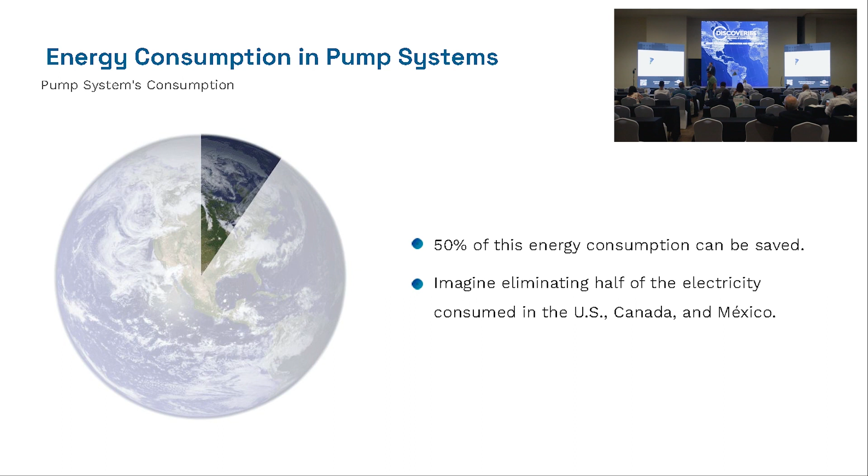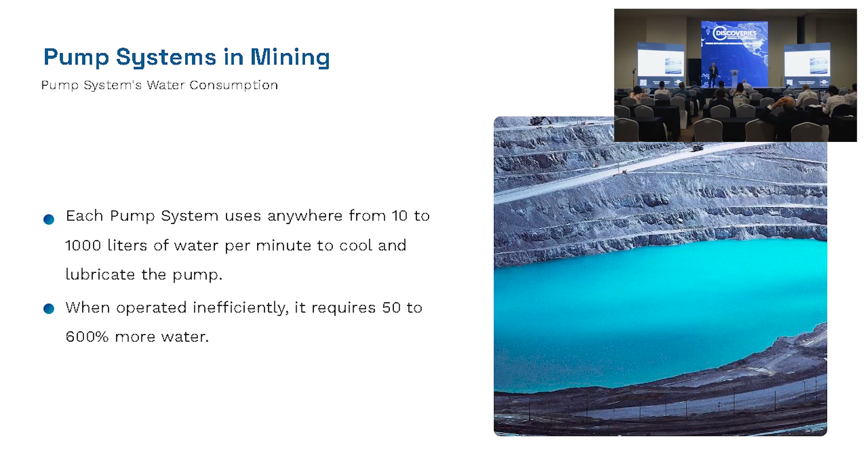In mining, up to 80% of the energy you're consuming is from the pump system. So this means we're talking about saving up to 40% of the energy consumption. And in terms of water, we heard earlier from the lawyer regarding the water consumption. Each pump system uses anywhere from 10 to 1,000 liters of water per minute to cool and lubricate the pump system. When operated inefficiently, which is what's happening in most cases, we're requiring 50 to 600% more water to cool and lubricate the pump. And there's been technology that's existed longer than me that can prevent this from happening. We can eliminate this water by 80%.

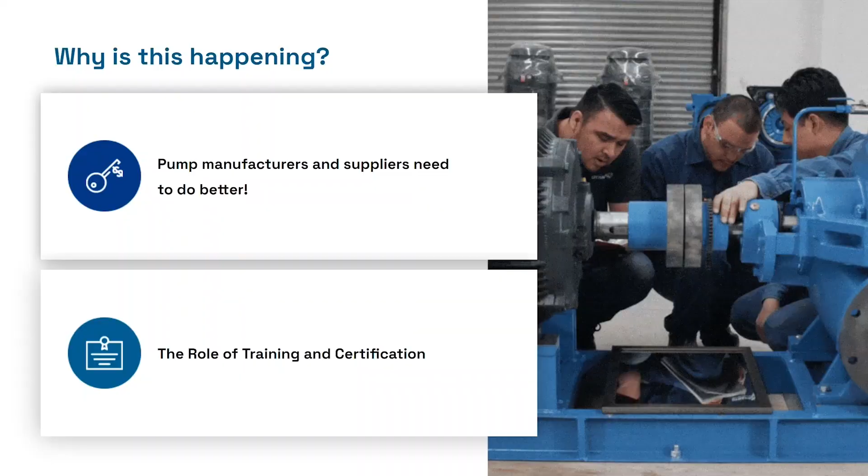So why is this happening? The first issue is pump suppliers need to do better. Right now, we're not selling the product properly. Right now, we're approaching the product as this is the most efficient pump, and it costs this amount, and that's pretty much your quotation, and that's what we're delivering to our clients. But we're not telling the true story about the pump system and why it's costing so much more in energy and water consumption. Which leads us to the second part, which is the role of training and certification.

We don't have the proper training and certification in the industry right now. I've looked high and low. I've taken different companies' trainings. I've been certified with different pump trainings. There's nothing that truly exists that gives the people who are actually operating the pump systems, the pump operators and the maintenance people, all the tools necessary to solve this problem.

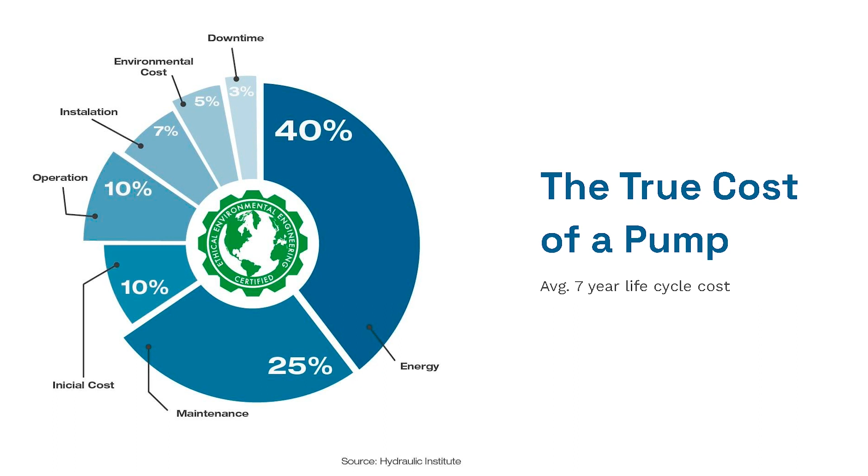And here's what happens. So this is looking at the first 7 years, the life cycle of the pump. And this is from the Hydraulic Institute, when they're measuring the energy consumption. So this doesn't even take into account the water consumption. But what you can see here is the initial cost of a pump is only 10% of the pump system's life cycle costs. The actual cost is in the maintenance and the energy consumption, but no one's paying attention to this. They're only paying attention to the upfront cost of the pump.

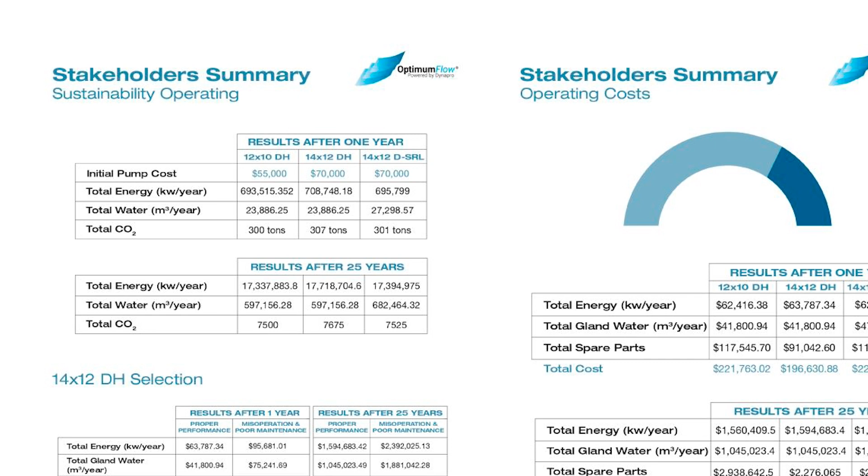So, it's difficult to see. However, this is the report that we've been working on to solve the problem. But you can see, maybe better than I can, on these first three right here is the initial cost of the pump. The first one's $50,000 or $55,000, the next two are $70,000, okay? And typically when we're selling a pump to a mine, they're looking at the efficiency of the pump. But that doesn't actually take into account how much energy you're going to consume, how much water you're going to consume, or even the CO2 that it's going to produce.

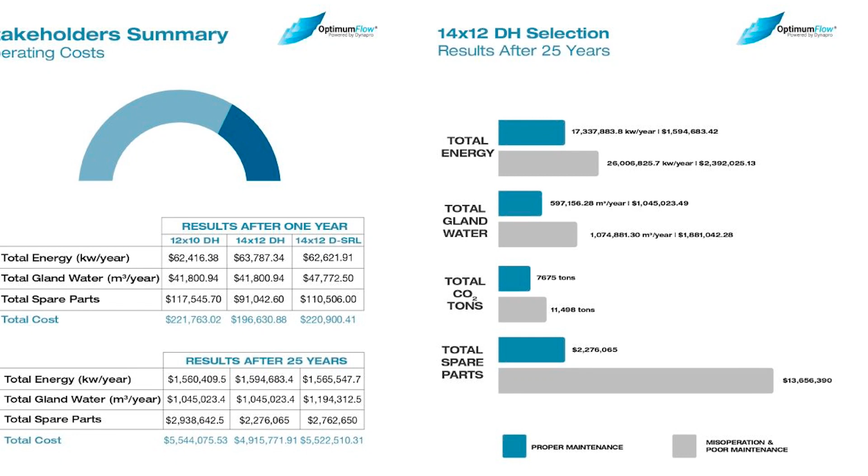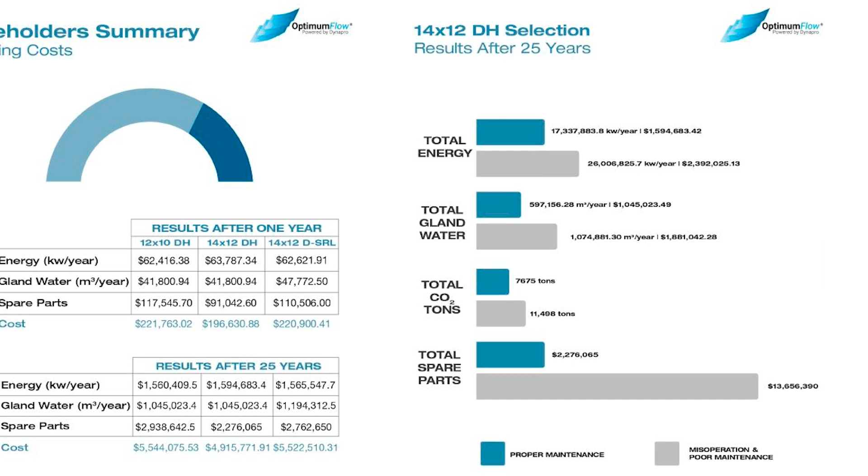And the last part, the total spare parts. So the maintenance of a pump system is actually directly related to how much energy and water it's consuming. And it's a telltale sign. So the more energy your pump system's consuming, the more times you're going to have to do maintenance. It means it's wearing down faster.

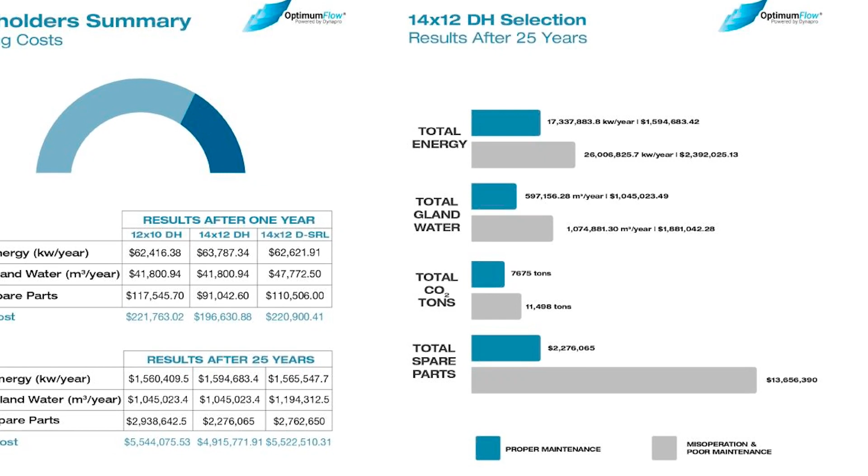And on this pump, the example, and these are examples that we have from the industry, we went from spending $2.2 million in spare parts over the 25 years to spending $13 million just in spare parts alone, okay? So we're talking about a difference of approximately $11 million. When we walk into these mines, they typically have about 300 of these pumps. So you can do the math yourself and how it's affecting your total cost of production.

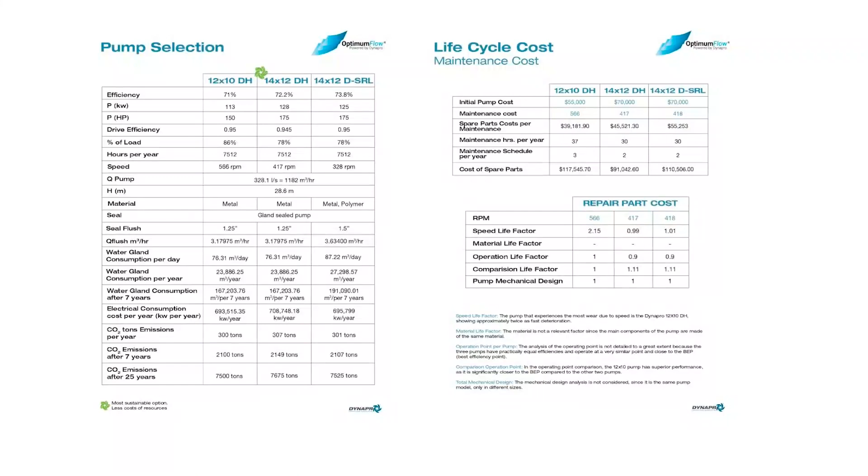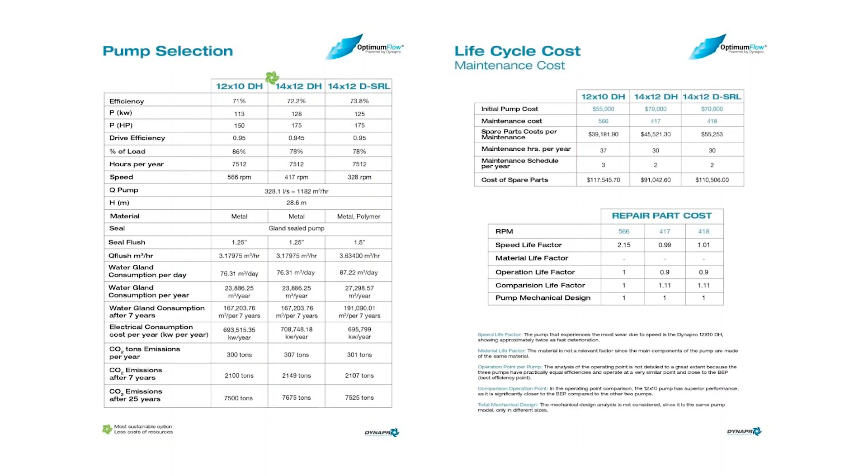So this is actually how we deliver our selection, and the selection provides you the complete breakdown, measuring everything that you need, the water consumption, the electrical consumption, the spare parts consumption. And what we can do is we can actually measure how much maintenance is going to be required. And it's by these different factors, by how fast the pump's running, the materials of the pump, the design of the pump, things like that. So we can actually predict it.

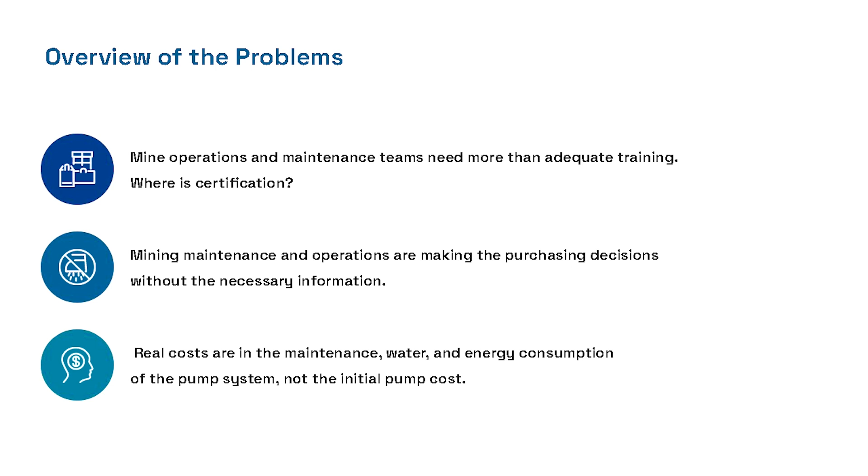But what's not predictable is how it's operated and maintained. And this is the real challenge. So mine operations and maintenance teams need more than adequate training. We don't have any global certification for this right now. Mining, maintenance, and operations teams are making the purchasing decisions, but they're making these purchasing decisions without the proper information.

They're basing it on, what's your price of the pump? How fast can you deliver it to me? Instead of looking at the actual life cycle cost of the pump. So the real costs are in the maintenance, water, and energy consumption, not the initial pump costs.

So who needs to be certified? Well, it starts with the actual pump suppliers and pump manufacturers. We have to have the salespeople, the applications engineers, everyone who's involved in the process of delivering that quotation to the customer. They need to be fully trained and certified. The next part is the mine maintenance and operations teams.

The people who are going to be in front of these pump systems for the next 25 years have to have the proper training. Right now, if you walk into any mine here in Mexico and ask them what training they've received, there'll probably be a blank look on their face. Okay, and then the last part is purchasing and stakeholders. You need to understand what you're purchasing for your operation and how it affects the outcome of your operation.

So as I mentioned, our mission is to accelerate the transformation to sustainable mining. So what we've done is created the Pump Systems Academy and OptimumFlow, which is a software system that supports it. So the Pump Systems Academy was developed to train these people who don't have the proper certification. And I'm happy to say we've been working really hard on this. We're the first company that actually has applied to the Secretaría de Trabajo here in Mexico, and will provide DC3 certification for all of the mine staff.

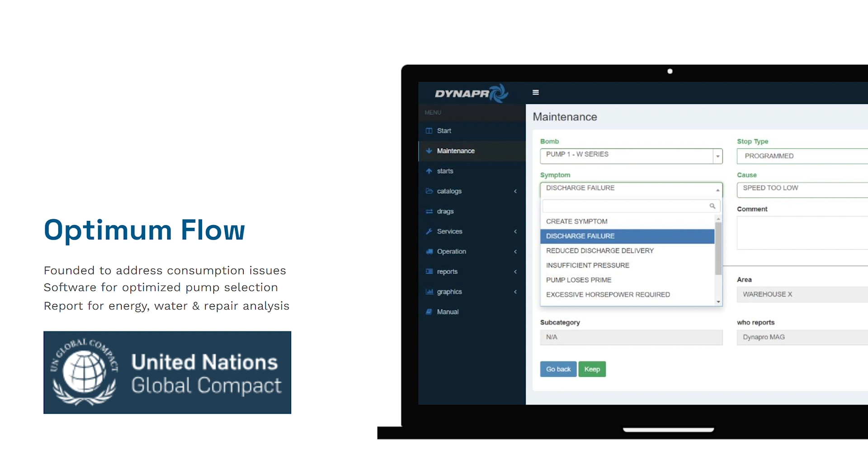And then above and beyond that, it's not possible for a company like mine to be in the field there all the time with the operators and maintenance team. So we created OptimumFlow. And what OptimumFlow does is when they see any symptoms or causes in the pump system that might trigger that there's a problem, they implement it into the system. And from there, within minutes, it gives them the training that they need.

So I asked at the beginning of this presentation for your help, and the help that I'm hoping that you will provide me is to share this information. We all have large networks. You might personally not be involved in pump systems, but someone in your network is, and they need to understand the impact this is having on mining reaching sustainability. So thank you for sharing this story.